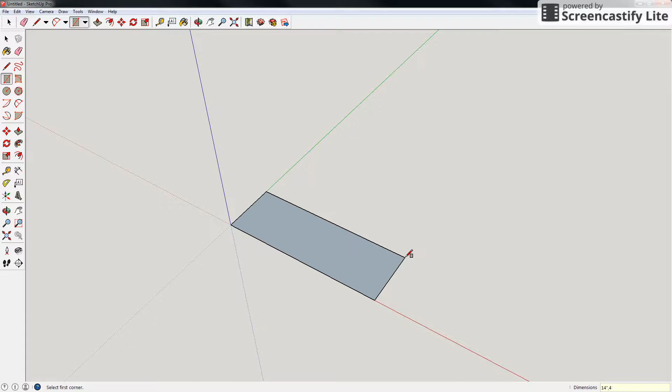We're going to bring it over, and immediately after you've made your rectangle, type in the dimensions 14 inches, comma, 4.5 inches, and then hit enter. Depending upon how big your rectangle was, it'll become really small. There's a tool up here called the Zoom Extents tool that will bring everything to the size of the screen.

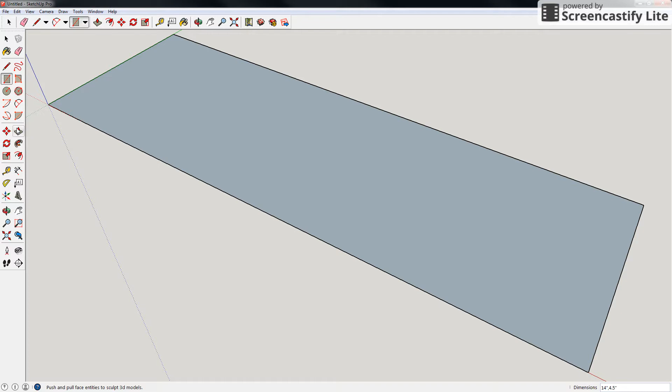Now we want to make this thick. Right now it's paper thin. We're going to click on our push-pull tool, lift it up, and type in 0.75, enter. That's 3/4 of an inch. Now we're able to hit the Zoom Extents tool again to get this whole thing.

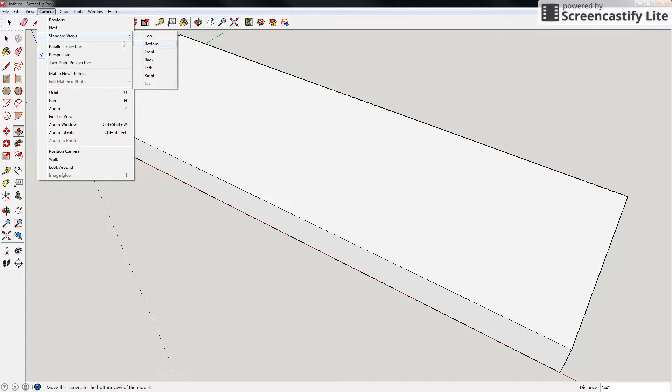Then we go to Camera, Standard Views, Top. It will give us the top of our shelf. Notice how this line here and this line here are not even. This should be right on top of it because it's a square piece. This is kind of a three-dimensional view of it, so we need to straighten that up so we're working on a flat piece of material.

So we're going to go to Camera, Parallel Projection. Notice how it's squared all that up. It's going to be easier to work this way.

Now I need to round these corners. These two corners are rounded because the front of our shelf has rounded areas here. So we're going to pick up the measurement tool, start over here, and move it over to 1 inch. I typed in 1 inch after I moved my line over with the tape measure. Now we're going to bring it from the top down, and notice how it'll snap into 1 inch, so I don't have to type it in again. If yours doesn't snap to 1 inch, just go ahead and type 1 inch in.

Now we're going to pick up this tool here, the 2-point arc. We're going to do a click here, a click here, and one more click. It's one click, and then tangent. When it says tangent to edge, you click, and it should make a smooth transition from here around the corner to the side. We're going to do the same thing on this side.

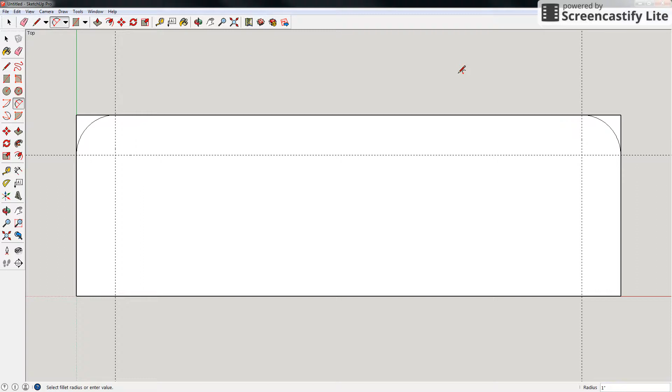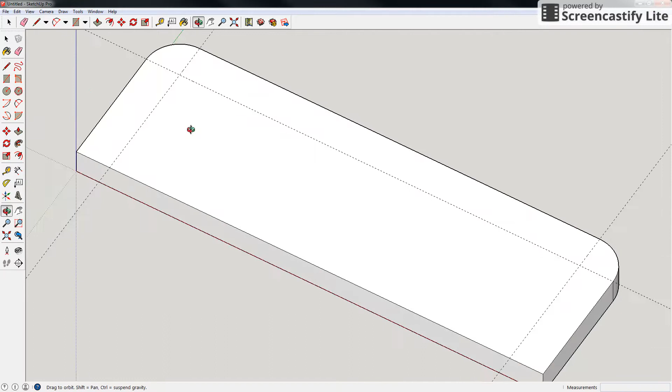tangent, click. Now we're able to go back to our camera, standard view ISO, and I can get rid of this material by simply picking up our push-pull tool, here, and we should be good. I can check the other side by simply spinning around and checking to make sure that all looks good. It does, we're excellent. We're going to use the Zoom Extents tool again, and then we can go up to Edit, delete the guides, and the guides will go away.

Now, if this was the top, this is the right side, this would be the front. So we're going to go to Camera, Standard View, Front. And what we want to do is we want to zoom into one of these corners, and we're going to do our round over because the top edge and the bottom edge have little roundovers.

We're going to do the same thing that we did with our curves, except it's going to be in a smaller context. So we're going to take our measurement over, and I'm going to type in 0.25, enter. We're going to do the same thing from the top down, 0.25, or 1/4 of an inch. I'm going to take it from the bottom up, 1/4 of an inch. Notice how it snaps into place.

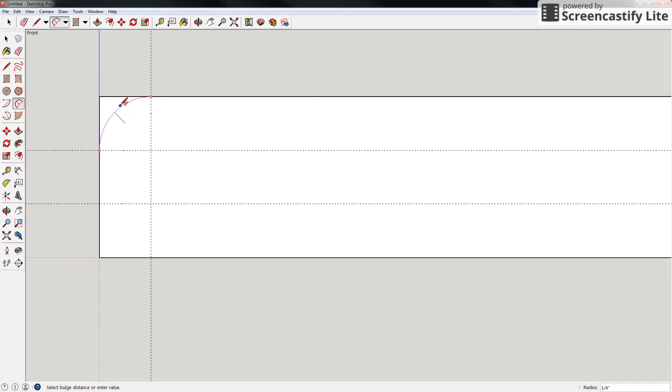I'm going to pick up the arc tool, and I'm going to do the same thing. Right there, now we've got those two arcs. You do not need to do it on the other side. Camera, standard view ISO, zoom extents tool.

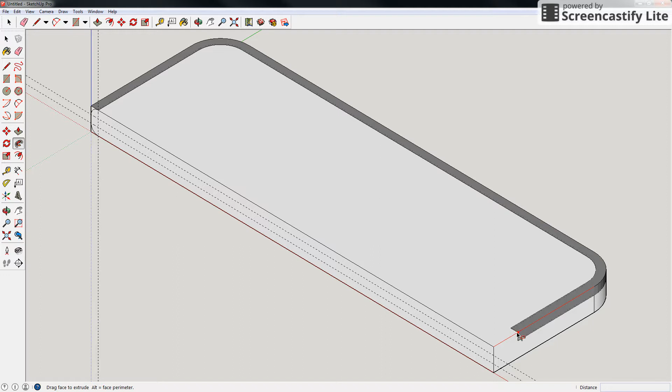Now, this little bitty corner, we're going to have to highlight using the Follow Me tool. The Follow Me tool looks at a profile, and then we can follow a line, and it gets rid of everything along that line. It's kind of like a push-pull tool, except it's able to go around corners. There's the top one. Now we're going to orbit it to the other side, and we're going to do the bottom one. It follows the line all the way around and stop there.

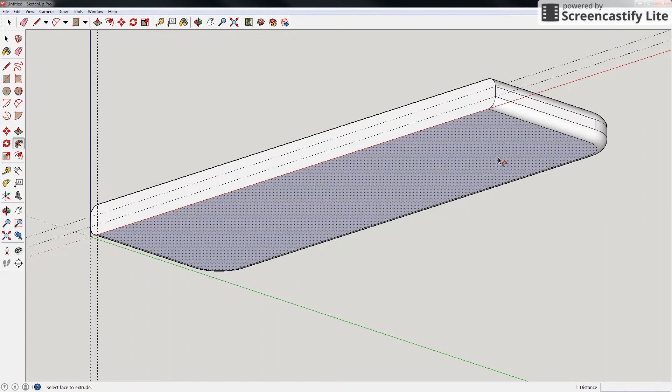At this point, we are finished with our top. All we have to do is clean up the guides.

Now we're going to save this, so we're going to save it, and it'll ask us where we want to save it at. You're going to want to save it on your mounted drive, which happens, I don't have it on my drive, but there'll be a drive that says your name on it. It'll be down here, you will double click on that drive, and then double click on My Documents. Then here is where you're going to want to add a folder. We're going to create a new folder and call that folder Shelf.

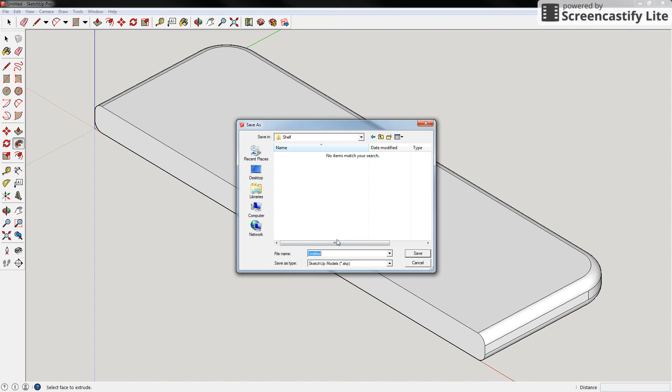Opening that Shelf folder, now we're going to title it. This is going to be the top of our shelf. We're going to save that, and we're going to use all those parts to put together to make our shelf.